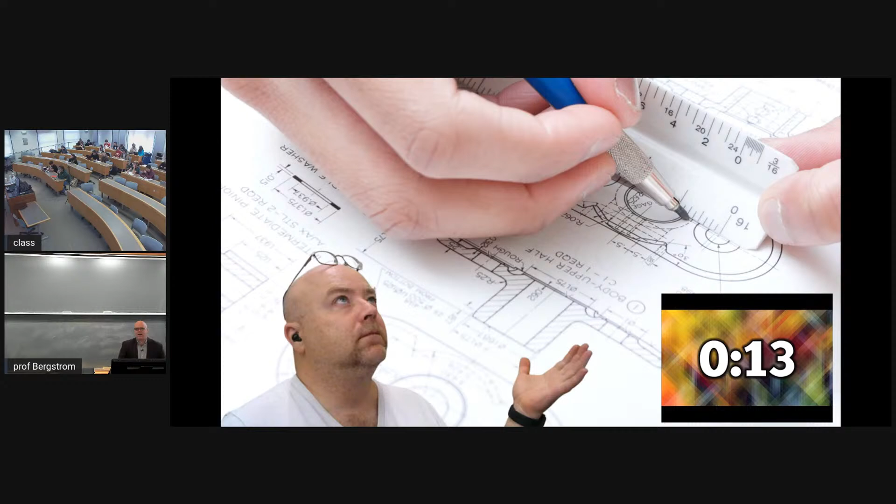But when I started trying to sit in the back of the bus, I didn't actually feel cooler. Actually, I probably felt more out of place. So I'm not certain.

But you do have to walk by all these seats to get to those seats. So I should ask these guys, why do you sit on this side? Is my profile better on the left side?

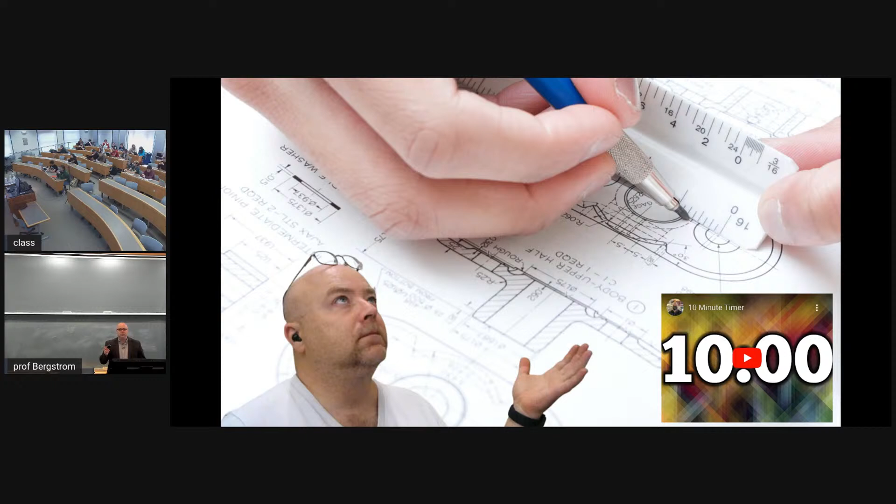First day of class, yeah. I actually had a professor that on the first day of class said, everybody sit where you're going to sit for the rest of the term. And so if you're going to go move, if you want to sit next to your friends or something, get up and move now. So I guess a few people got up and moved. And then he took pictures.

I told you this on the first day, right? Yeah. Whose name do I remember?

Oh, come on. You have to laugh at my jokes, even when they're stupid puns. You know that laughing at my jokes is worth way more extra credit than any extra credit assignment could be worth, right? That was good. If I only knew your name.

Tucker. All right. Today's topic is design for manufacturability. And it is—

This concept of design for manufacturability has been the bane of my existence for the past, I don't know, 30 years. I wanted to say 20, but then I realized I was older than that. 30 years.

And so I know I asked at the beginning of the class, but raise your hand if your intent in life is to design stuff.

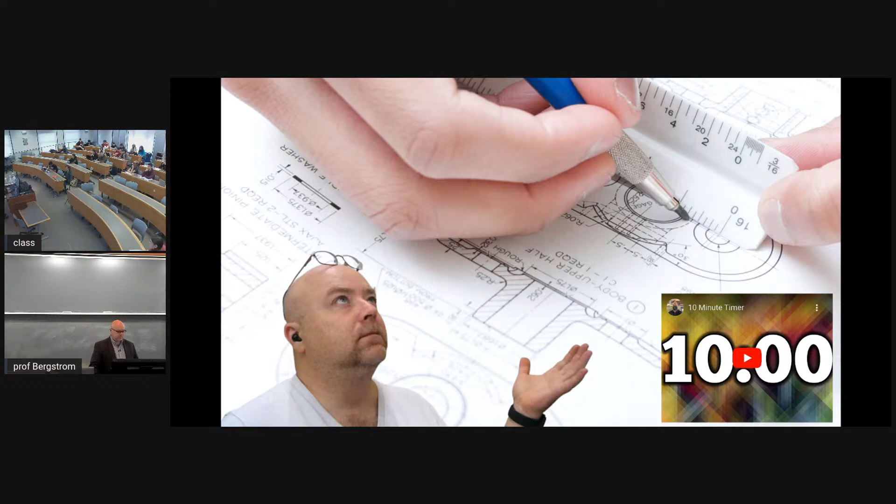So what is it when we want to design stuff and we go to college to design stuff? What's the first thing we think we need to know when we've decided we want to be a designer? Or even if you're not the designer, you know them. What's the first thing we need to know prior to designing? The tools we use for designing. So the tools we use, right? What software are we going to use for designing?

Now, when I was a kid, I mean your age, they taught us how to roll the pencil in our fingers so that as we trace it across the paper, the line thickness would not change. So what do you guys use? Solidworks? Mostly? Solidworks or AutoCAD or something like that?

So how do you change the line thickness in Solidworks? You select the line and right click and say change line thickness. Yeah. So if we wanted to change the line thickness, we had to pick up a different pencil, because we had the 0.5 pencil and the 0.7 pencil and different pencil sizes. So I guess, what does that make us? Real engineers?

Were you raising your hand or scratching your? Okay, just checking.

So we like to learn the software first, because the software is the tool we use to do design. Is that correct? Is software actually the tool we use to do design? Software might be the tool we use to represent the design, but what's the tool we use to do design? It's our brain, right? We use this to do design.

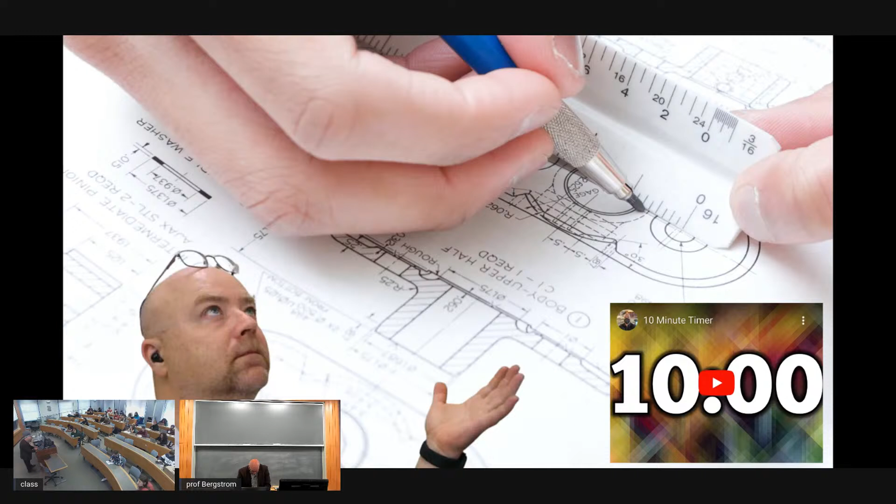So when people talk about design for manufacturability, they often think of design for assembly. We call this DFA, and there's books written about it. There are some famous professors from URI and UMass Amherst who created this whole design for assembly concept, Boothroyd and Dewhurst, we call them, because those are their last names. And they talked about how you design stuff so it's impossible to assemble it incorrectly.

Assembly is a very important manufacturing process. Everybody agree? A lot of stuff that gets manufactured has some assembly step. So some of the things they talk about is design. If you get two pieces that have to fit together, design them so that it's impossible to put them together in the wrong orientation. So either make orientation irrelevant or make it so they only fit one way, right? So you put some locating feature so it has to go in.

So, any NASCAR fans? Anybody watch a NASCAR race this year? What was one of the major differences on the car they used this year? So they used a single lug nut on the wheel. It's one of the major differences.

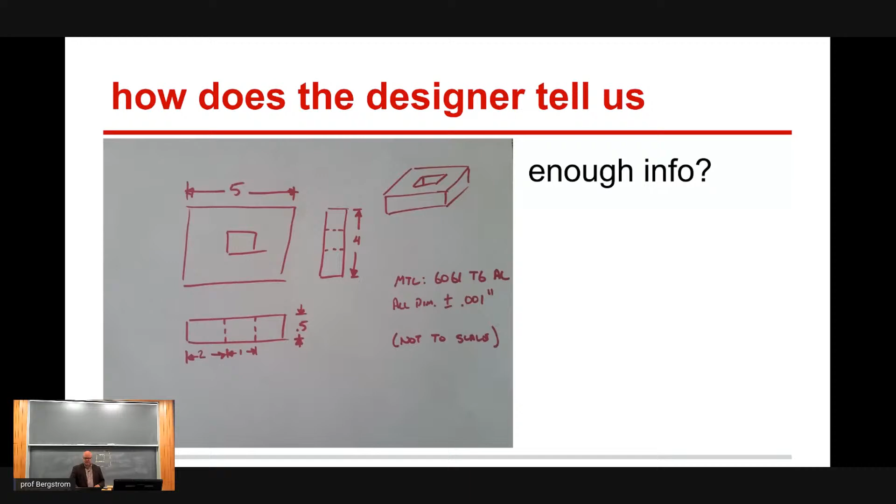Yeah, all right, we did that.

As a designer, what are some things you want to avoid? You don't want to be a kid with CAD. What do kids with CAD do? They draw features that are expensive to make.

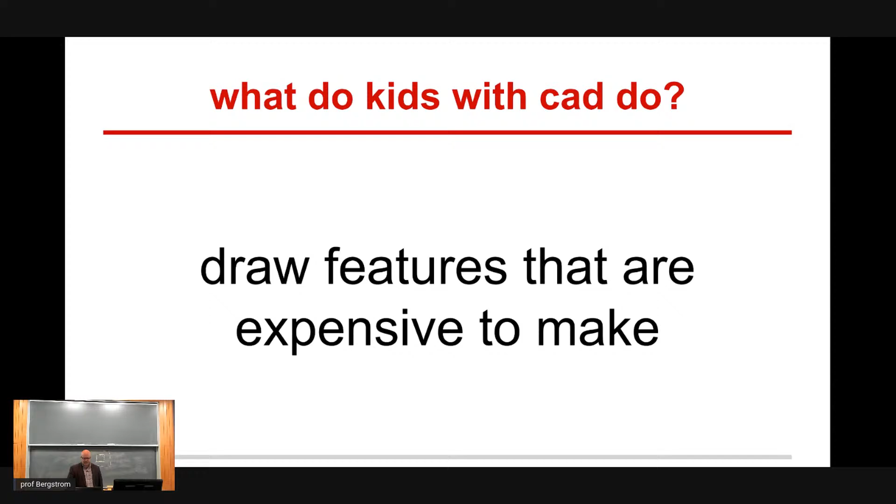What should we think about? So, what's the difference between a chamfer and a fillet? A chamfer is like a straight edge. So if I wanted to chamfer this edge, I would make it go like that. If I wanted to put a fillet on this one, I would make it look like that.

All right, so rule of thumb: fillets are good on outside corners. Or sorry, chamfers are good on outside corners. Chamfers are not as good on inside corners. Fillets are good on inside corners, more expensive on outside corners.

Let's think about it. So if we were going to cut this, if this was the z-axis, and we wanted to make that chamfer, what do we do? If the part's coming out of the board towards us and we want to make that chamfer, we take a chamfer end mill. We take an end mill that's got a chamfer on it, and we run it along that edge, and we can make that chamfer.

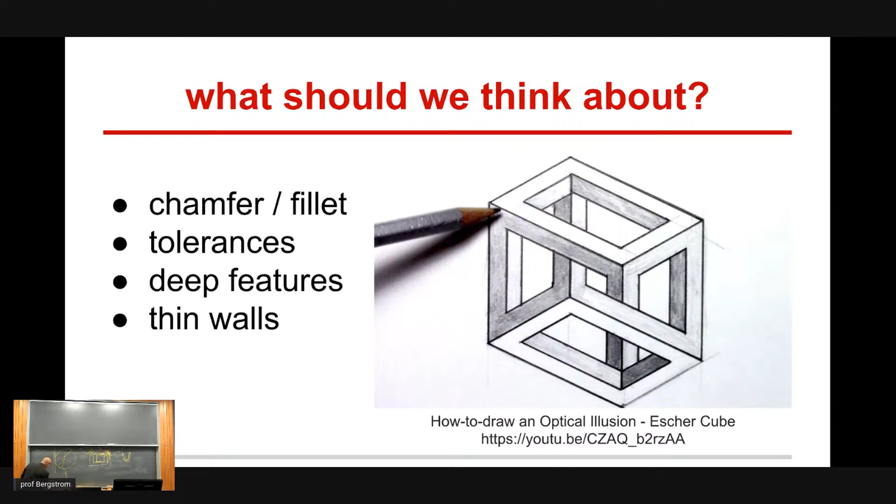Turns out when you want to make a thin wall, you don't want to have a finish pass. You actually want that last pass to be a big bit of material, because if this is our tool moving sideways, and I've got just a little bit of material here, now this is the thing that's going to deflect. But if I've got a little bit of material here where I already cut, and a lot of material here, it's stronger at the part where we're cutting it, so it's not as likely to deflect.

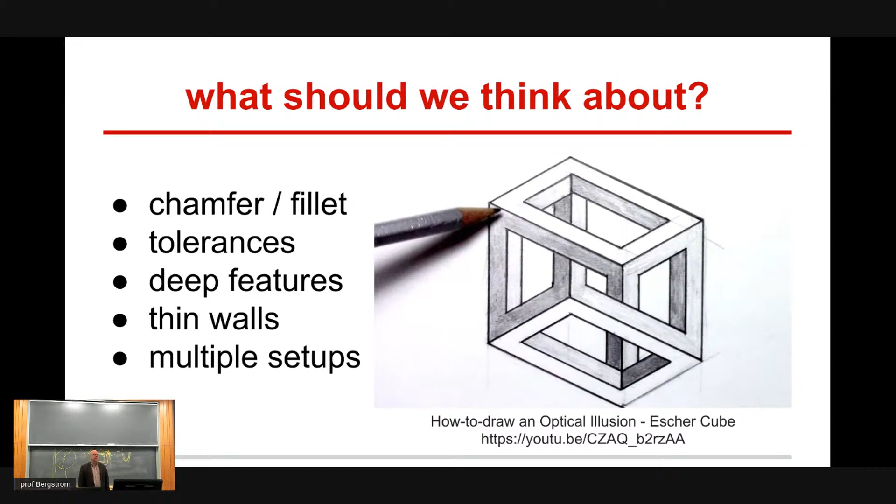Put the part in the machine as few times as possible. Every time you have to put the part in the machine, it's more likely that it's going to fail or you're going to make a mistake. I think that's it—yeah, some materials are easier to cut than others. Chamfers versus fillets, yeah. But if you have just a second, my favorite YouTube video of all.

Talking about the...